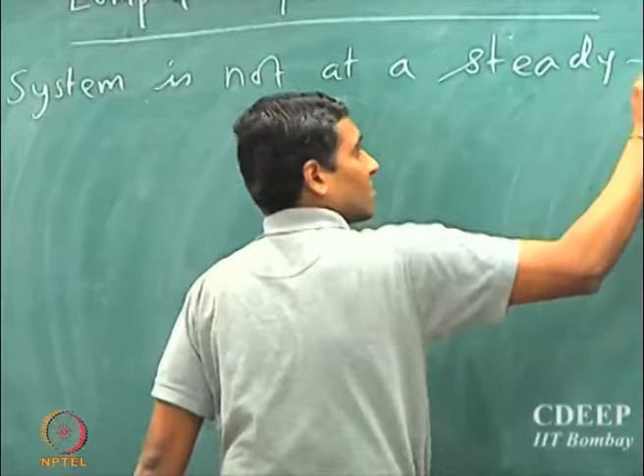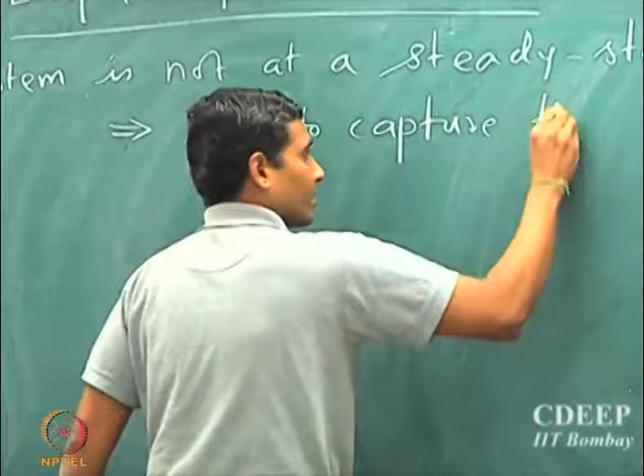So far in most of the cases in conduction, we assume that the system is maintained at a steady state. Okay, so what happens if the system is not at its steady state? It's possible it's not maintained.

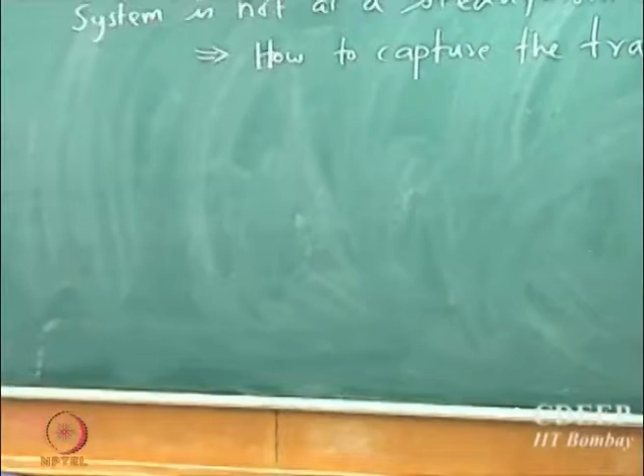A very easy example is you take a cup of coffee, tea, or milk, whatever, and just leave it on the table. So there's really no steady state till the system reaches the same temperature as that of the surroundings. So really the steady state of a cup of coffee or chai kept on the table is the state at which every location or every particle in that cup actually reaches the temperature of the surroundings.

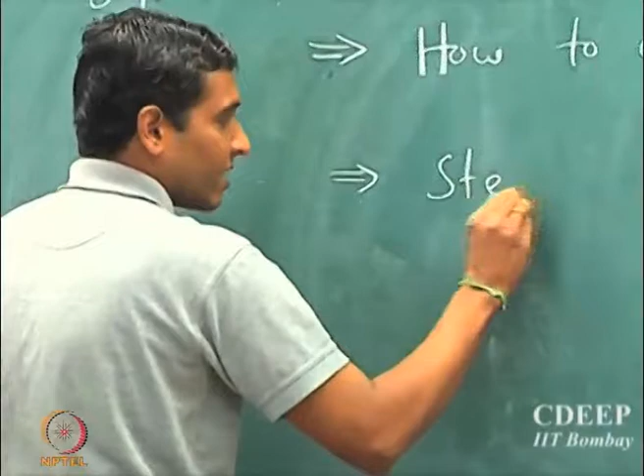Or the steady state really here means steady state is equilibrium with the surroundings.

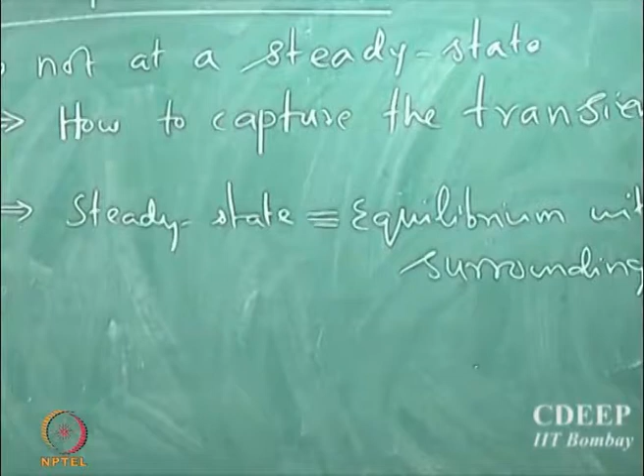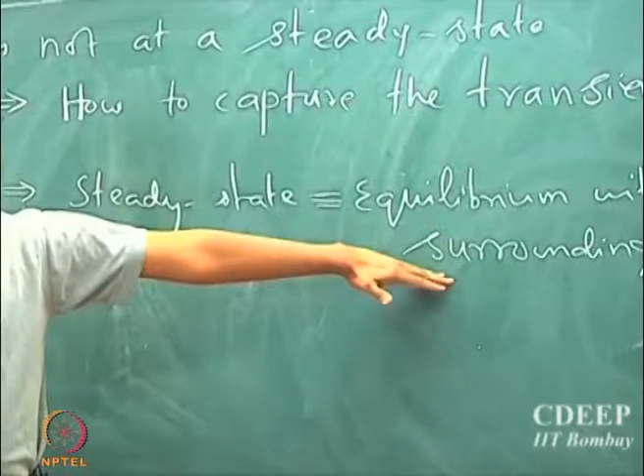So all the cases we have seen, all the models we have written so far, except for the general model that we wrote, are all for systems where it has already reached an equilibrium with the surroundings. So the question is, that's not always true. There are systems where they may not be under equilibrium. So how do we characterize them? How do we quantify them? And what kind of analysis and understanding can we get?

So that's what we are going to see in most of today's lecture. Okay.

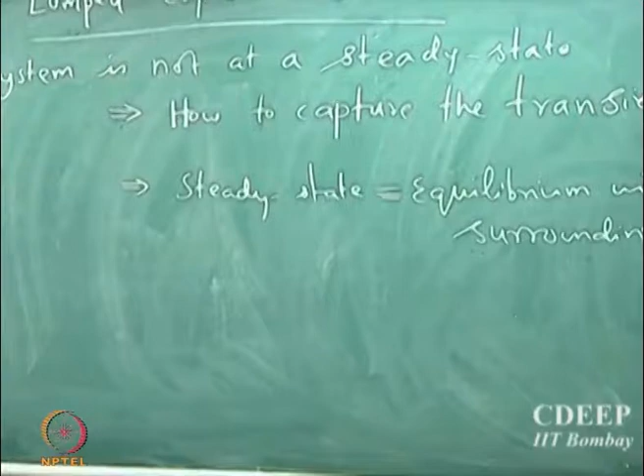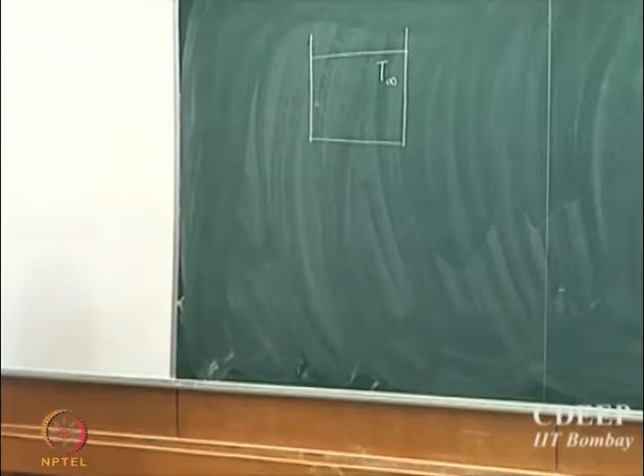So supposing we take a container, okay, which is filled with a certain fluid, and let's say that the temperature of the fluid is T infinity. And let's say there is some solid material whose temperature is Ti. And if I assume that T equal to 0, that is time equal to 0, is essentially when this body is actually outside the fluid, and at T equal to 0 I drop it inside.

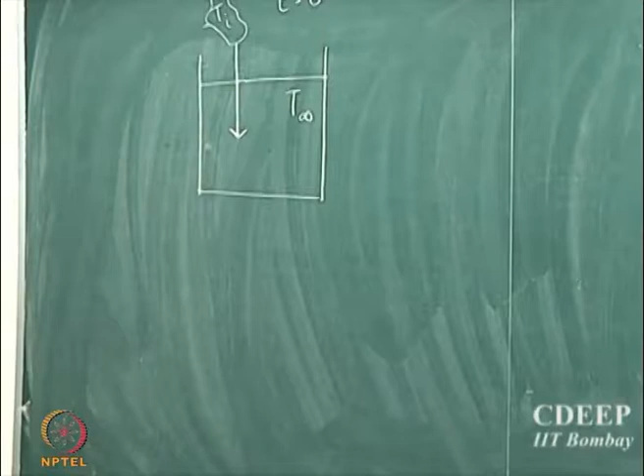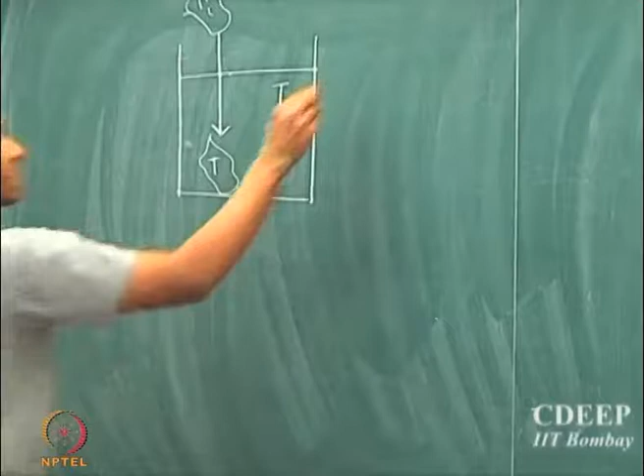So I drop the solid body into the liquid. So supposing if Ti is greater than T infinity, as soon as you drop it, there is going to be exchange of heat. So the solid, because it is at a higher energy state, at a higher temperature, it will lose heat to the surrounding fluid, and then it will attempt to equilibrate itself with the surroundings. So that's the normal process.

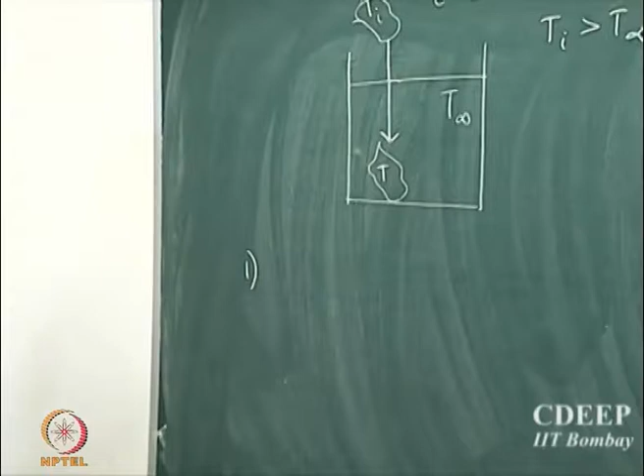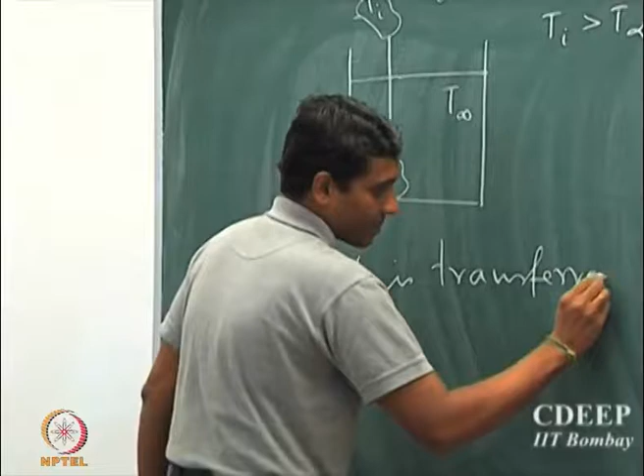So the first observation is that heat is transferred from solid to liquid.

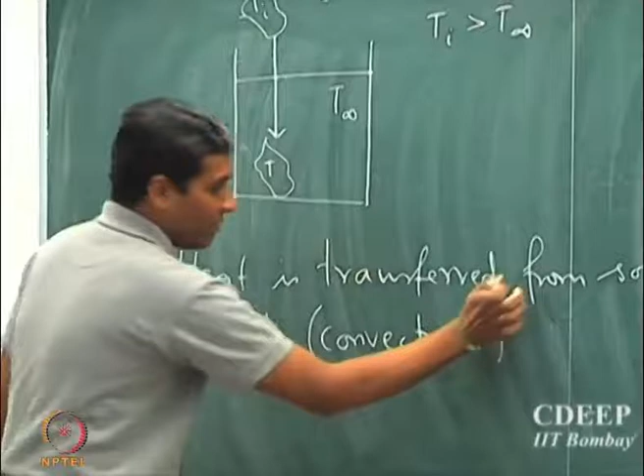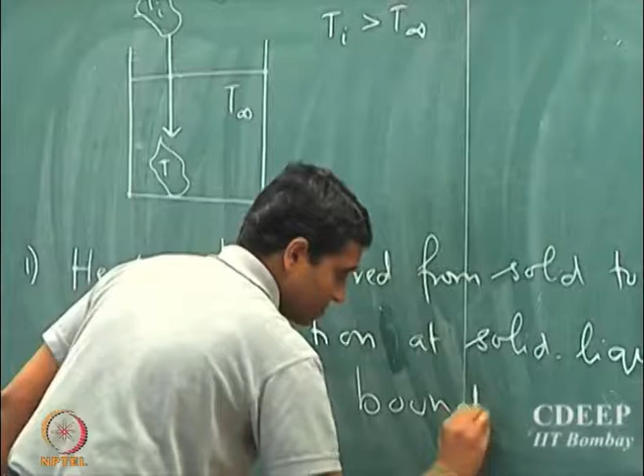What's the mode of heat transfer? Convective, right. So what really occurs is convection at the solid-liquid boundary.

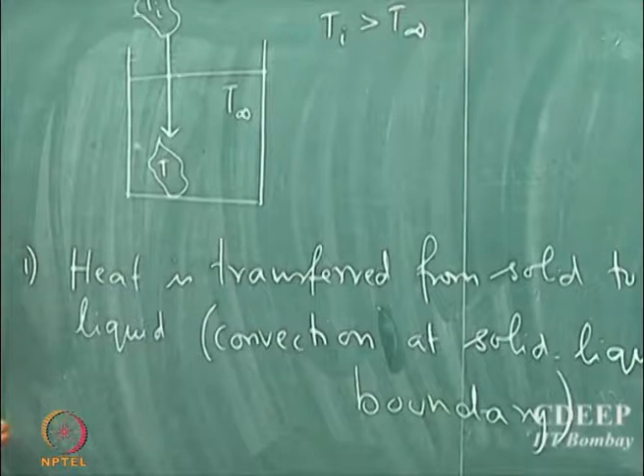What happens inside the solid? So there is conduction, okay.

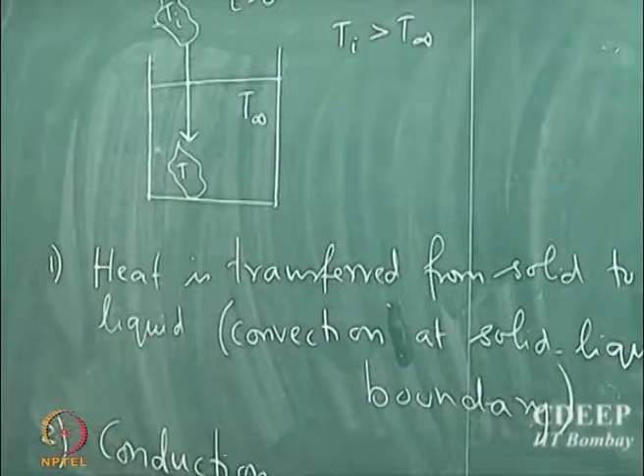So there are two ways to go about it. Supposing we say that conduction is important inside, then we know how to write the model. We've done that. We said accumulation equal to input minus output plus generation, etc. So if I assume that generation q dot is 0, we know how to write it.

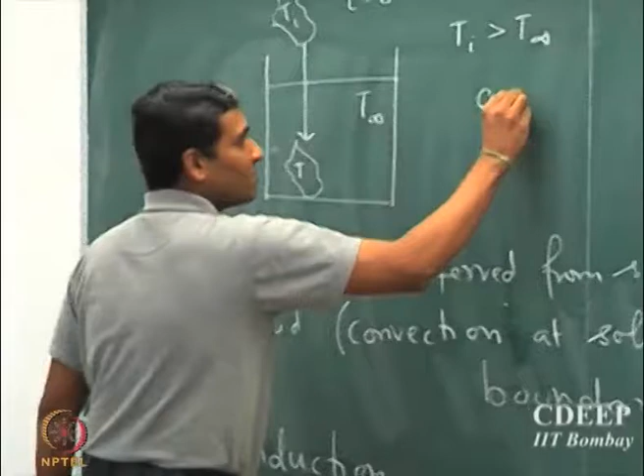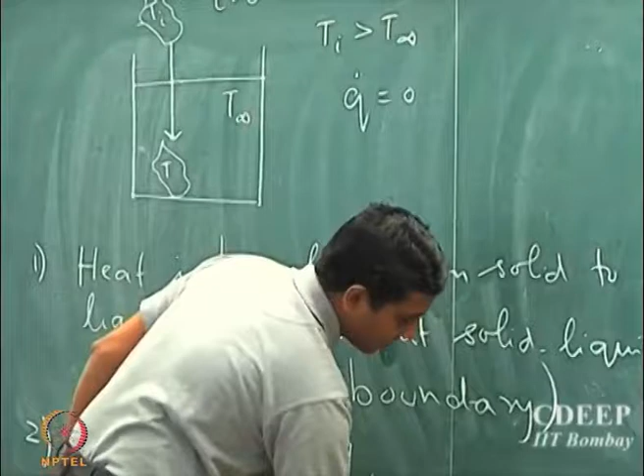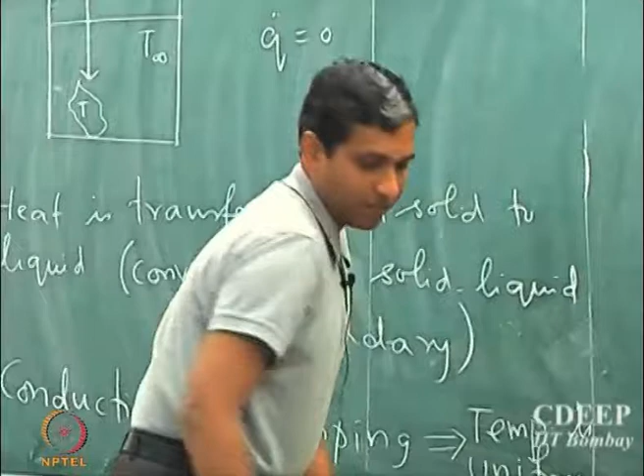Now, supposing if the dimensions of the object are very small in all three dimensions, then one can do what is called the lumping approximation. What it really means is, as we have seen before, we assume that the temperature is uniform in the solid. So that's what we mean by lumping here.

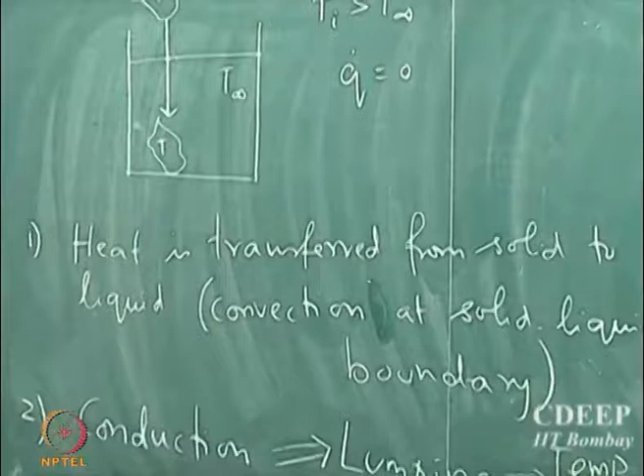Now, how do we model this? You want to try? How should we approach it? The objective is we need to quantify this process. Where do we start? So whatever heat is lost, if you assume the temperature is uniform, whatever internal energy is lost to the fluid is equal to the rate at which the temperature is changing somehow, right? So there will be some proportionality constant, etc. That has to be related to the rate at which the temperature is changing inside the solid.

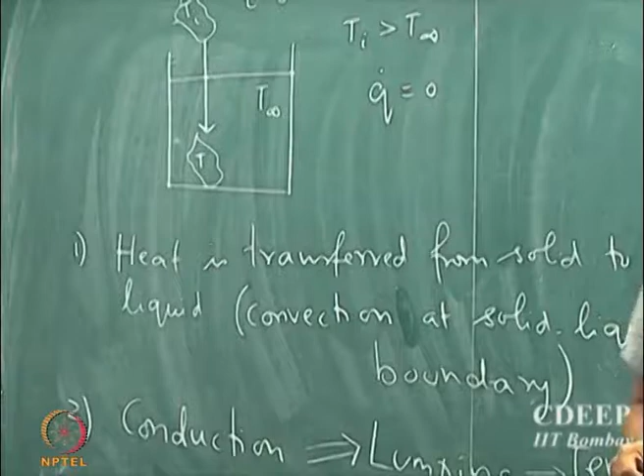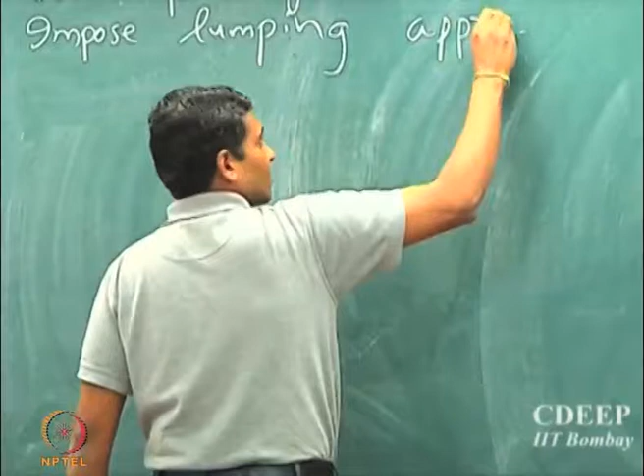So there are two ways to write the model. One, certainly you could start from the general model and then impose the lumping approximation. It's not very difficult to do, in fact it's very easy. All you have to do is integrate and substitute the corresponding boundary conditions.

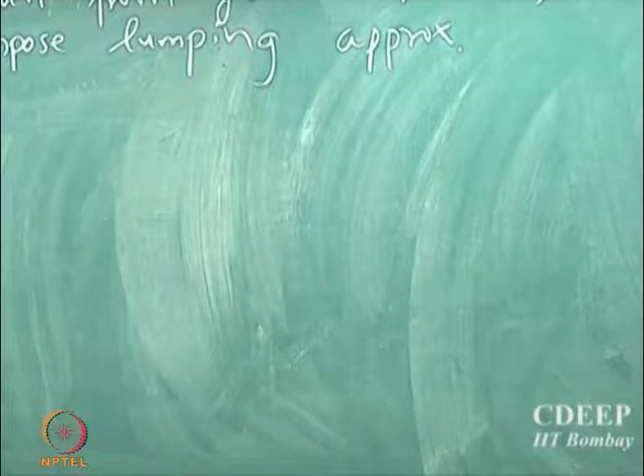Now, a simpler way to do this, that involves some math of course. A simpler way is one can write the model from first principles.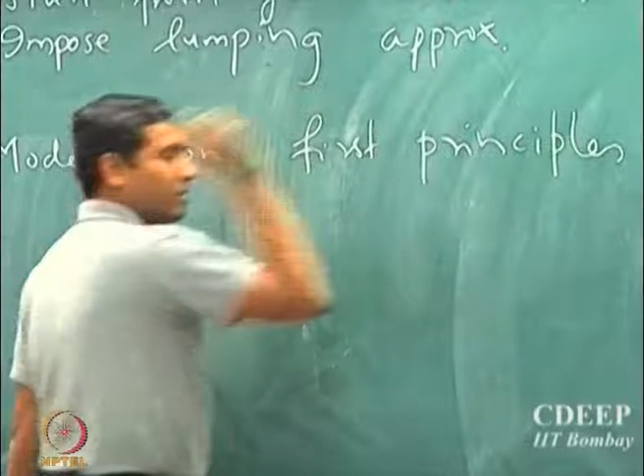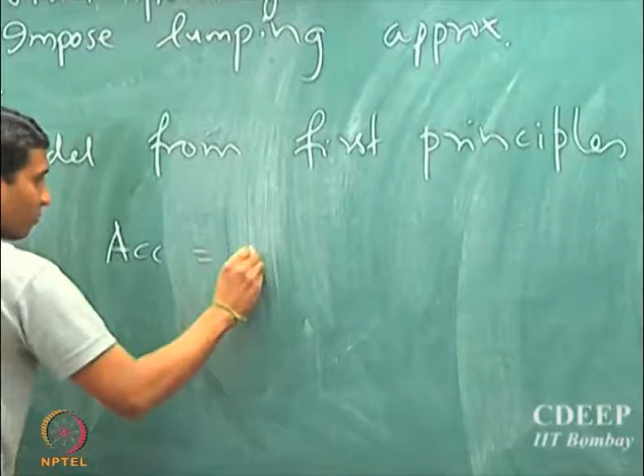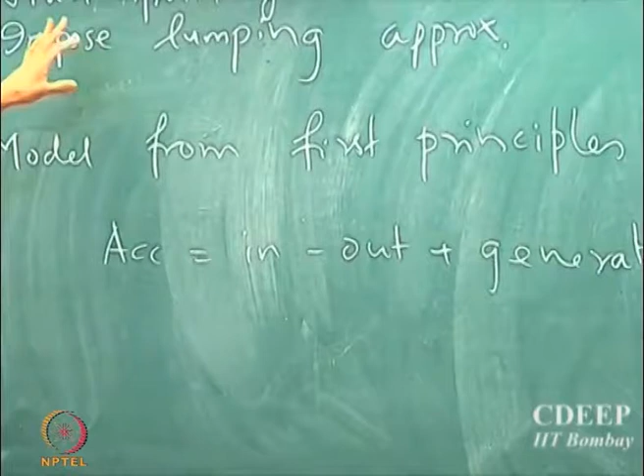A simpler way is to write the model from first principles. We know the common mantra for all of these: accumulation equals what comes in minus what goes out, plus what is generated. The original general model was also derived using this mantra, but if you use this route, whatever lumping approximation you would do by integrating is already taken into account by writing the model from first principles. You could do either way, it doesn't matter. You should get exactly the same model.

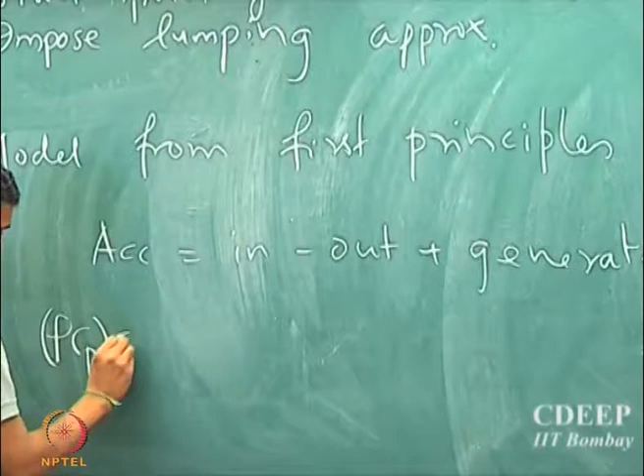So it's very easy to write this: rho Cp into dT by dt. That's the accumulation term.

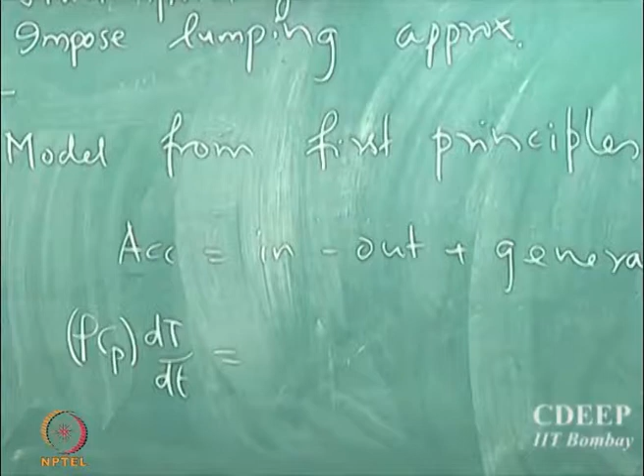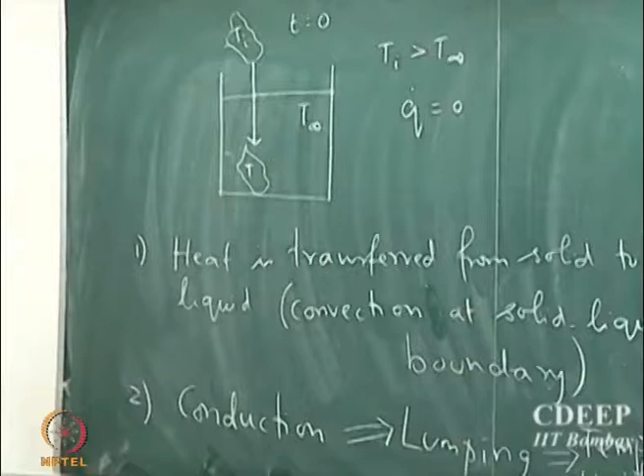What's the input? So the first thing I want you all to realize is that when we wrote this first principle route to find a general model, we wrote a differential balance. Now when we introduce the lumping approximation, there is no differential element here. So what do we do?

We need to multiply this by area.

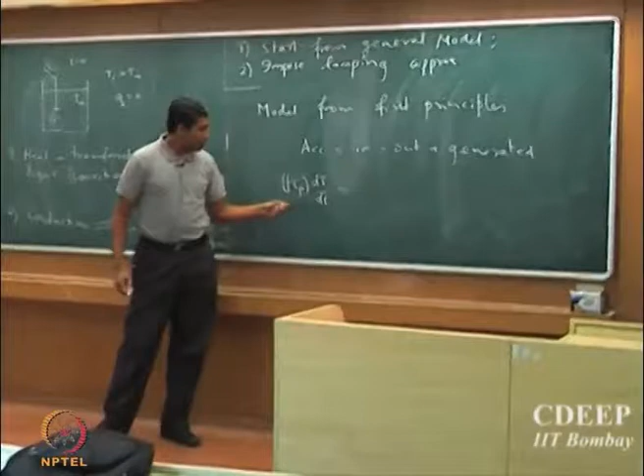That's not right. The first term here corresponds to accumulation. You should remember that rho Cp reflects or quantifies the amount of heat that is stored inside the system, inside the solid. So that's a volumetric process. The capacity of the system or solid to store heat is actually a volumetric process, not a surface area process. So you have to multiply this by the volume of the system you are looking at.

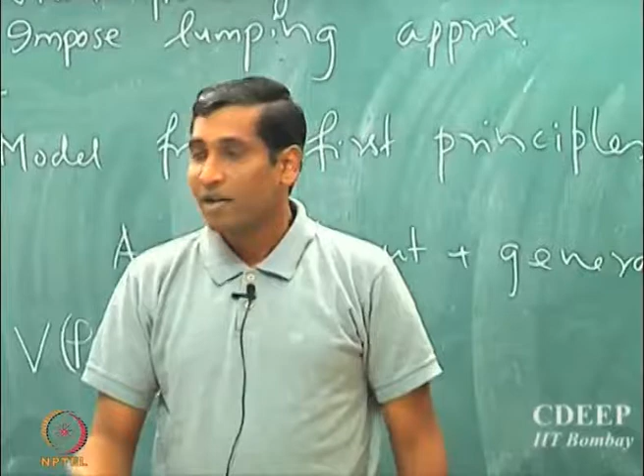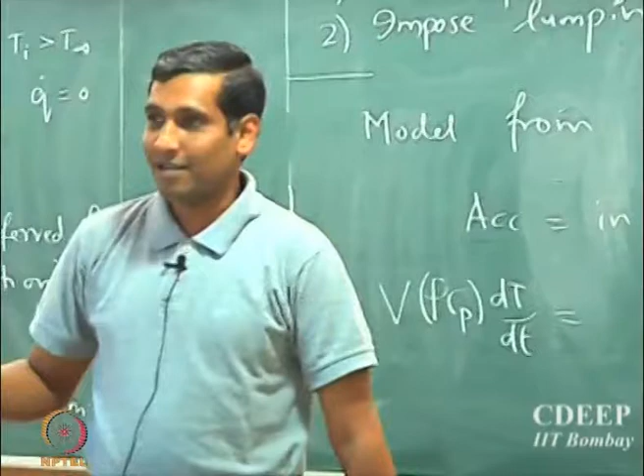If you do it from the first principle, from the generalized equation, and integrate, the volume scaling will actually come from the integration. It's a good exercise to try this: start from the generalized model, introduce the lumping by integrating over the whole volume, and you will see that the volume term will come as a scaling factor in the accumulation term.

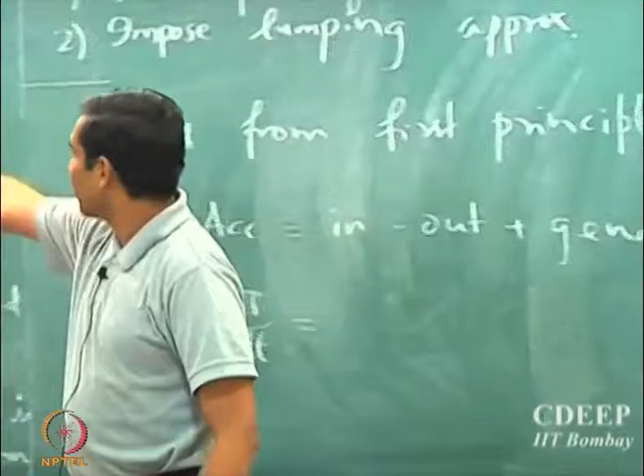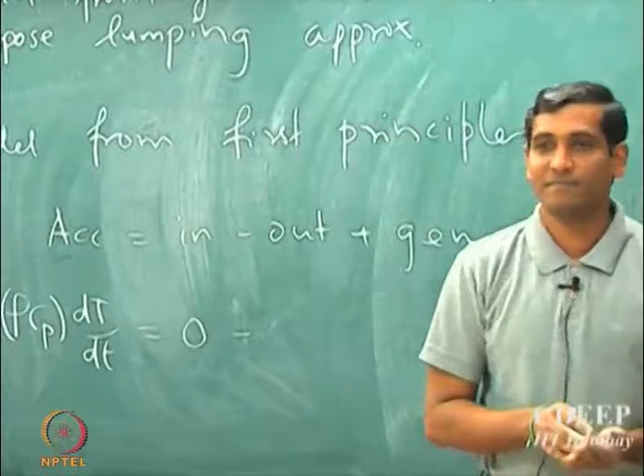So what comes into the solid? Nothing, because it's heated and suddenly dropped inside, so there is no heat coming into the solid, input is 0. What is going out? H into, that's the convective mode of heat transport, which is a surface area process, so it's H into the total area available for heat transfer, multiplied by the temperature difference. That's the amount of heat going out, plus generation is 0.

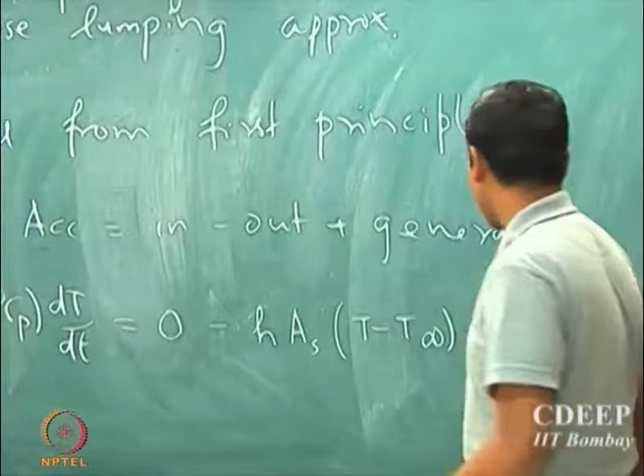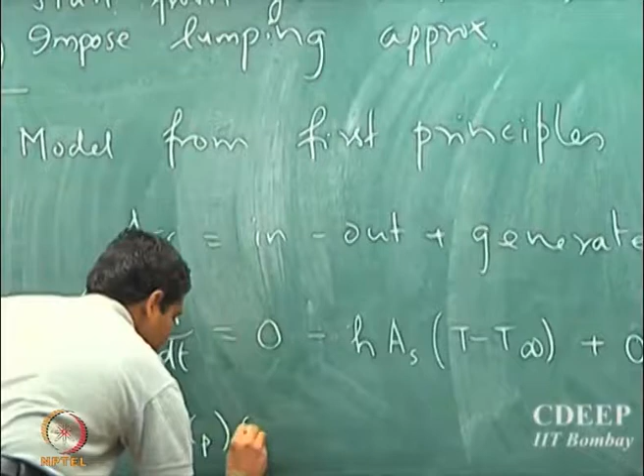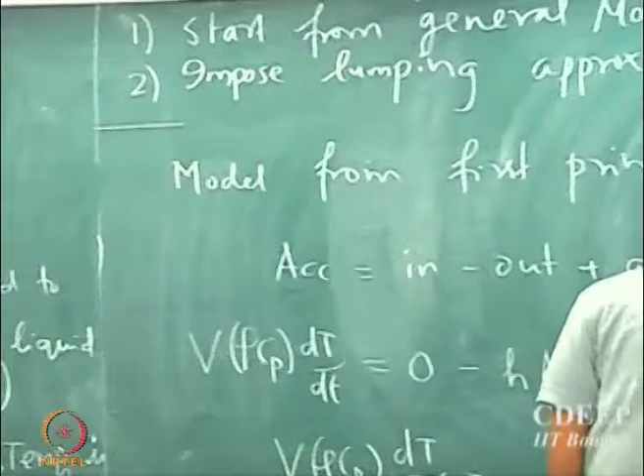So the model is very simple: V times rho Cp dT/dt equals minus H As times T minus T infinity. That's the model. What's the initial condition? T is Ti, that's it. So the initial condition is T at t equal to 0 equal to Ti. Is that clear to everyone?

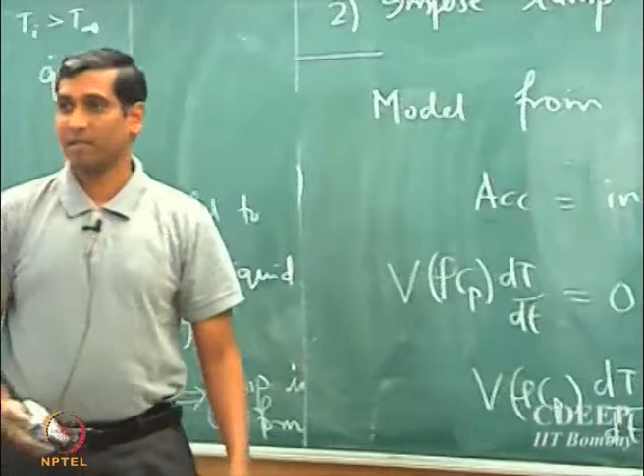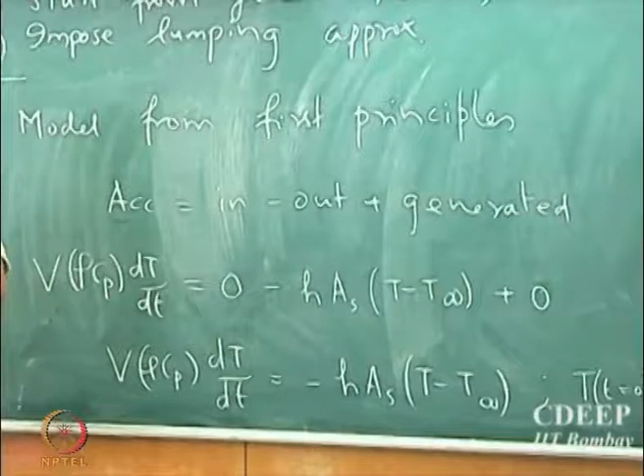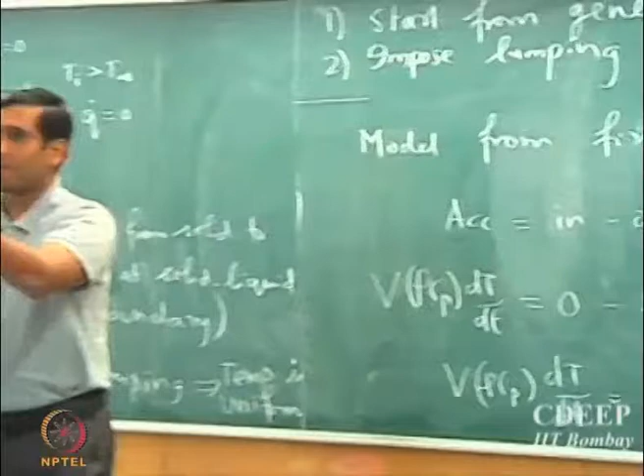So far we didn't get into this because it wasn't required when looking at differential balances. You must understand that the capability of a system to store heat is a volumetric process, while its capability to transport heat is a surface area or cross sectional area process. Whenever there is conduction, it's heat flowing across a cross section, and whenever there is convection from the solid to the fluid around, it's the surface area that matters. So you must understand the correct set of dimensions associated with each of these terms in the model.

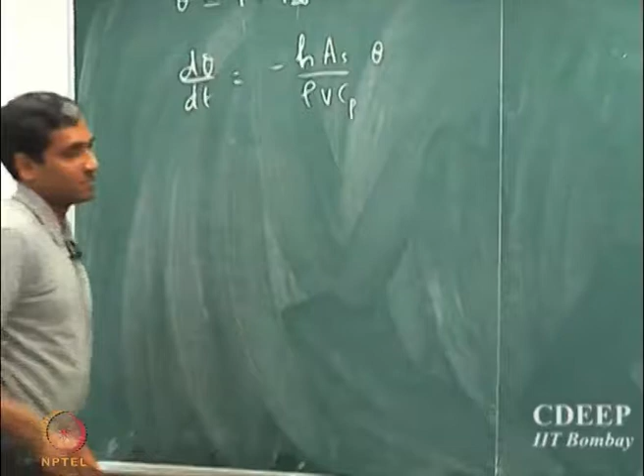So the solution is very trivial. If I assume theta is T minus T infinity, I can rewrite the model as d theta by dt equal to minus h As by rho V Cp into theta. And so the solution is theta by theta i equal to exponential minus that term times t. That's the solution.

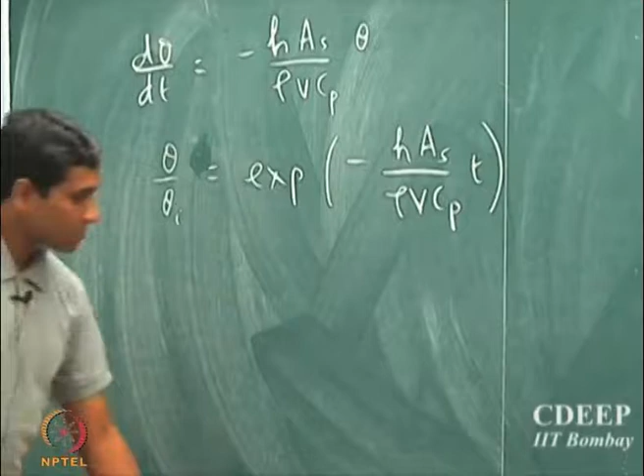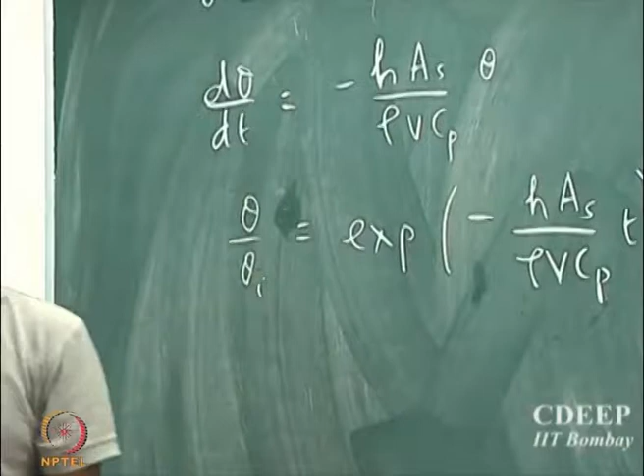What can we say about the coefficient in front of time? What should be the units of this coefficient? It should be 1 by second, right? Because the quantity inside the exponential should be dimensionless. So if time is in seconds, the units of the coefficient should be 1 by second. So it really signifies a time constant.

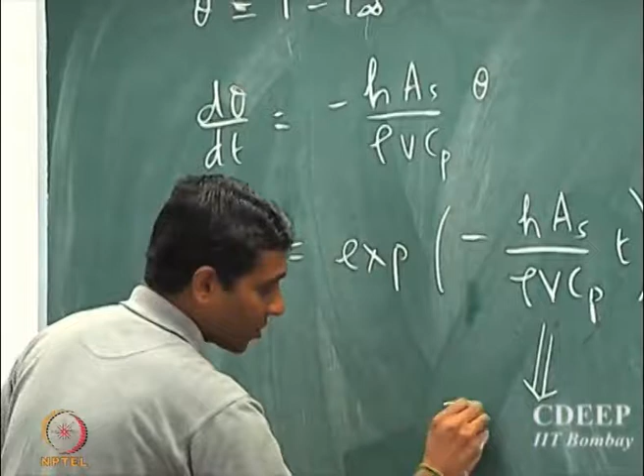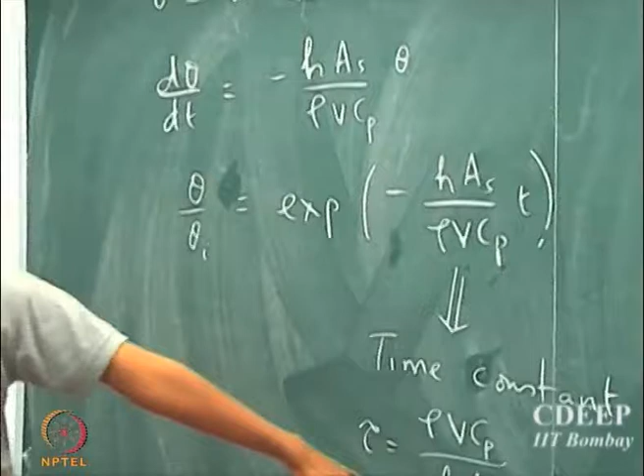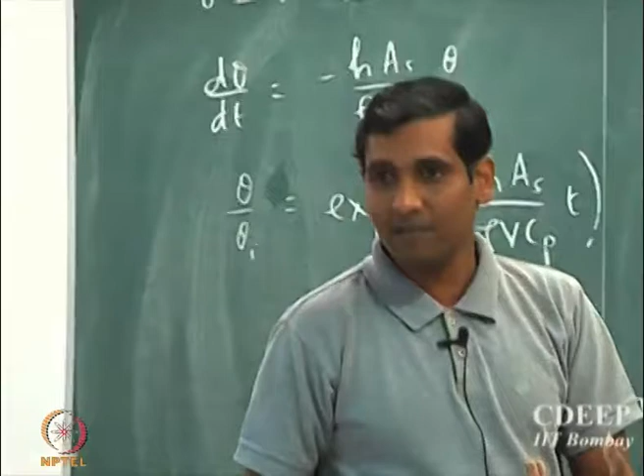Based on the coefficient, one could define a time constant for this process as tau equal to rho V Cp by H into As. If you plug in the units, you will see this exactly has the units of seconds, dimensions of time. So one can define a time constant for the process, which signifies the time taken for the heat to be lost from the solid to the fluid.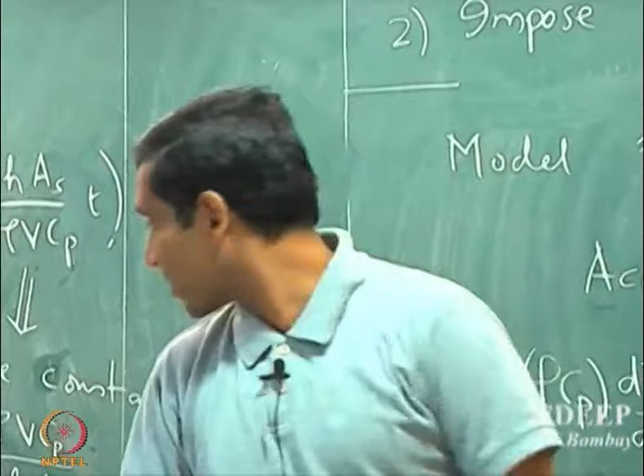Note that you can see two terms here, so there is once again a competing process. One is the ability of the solid to store heat, the other is the ability of the system to lose heat to its surroundings. So one could rewrite the time constant as something like this.

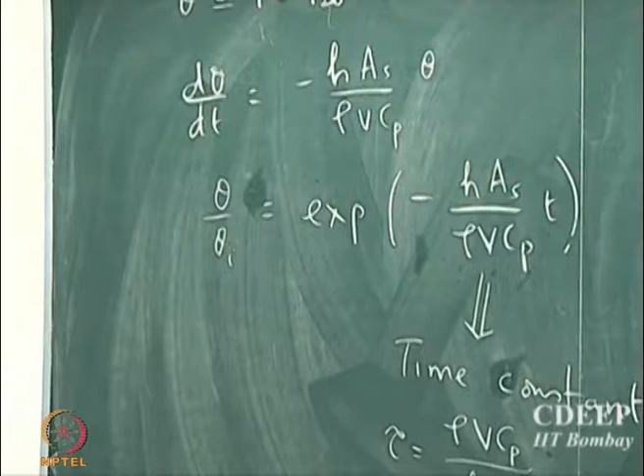So you can write tau as 1 by h into As into rho v into Cp. What is 1 by h into As? It's the resistance for convective mode of heat transport. So you can define this as resistance for convection.

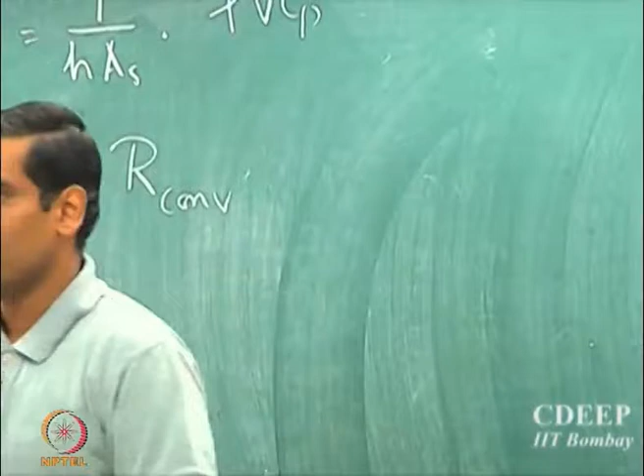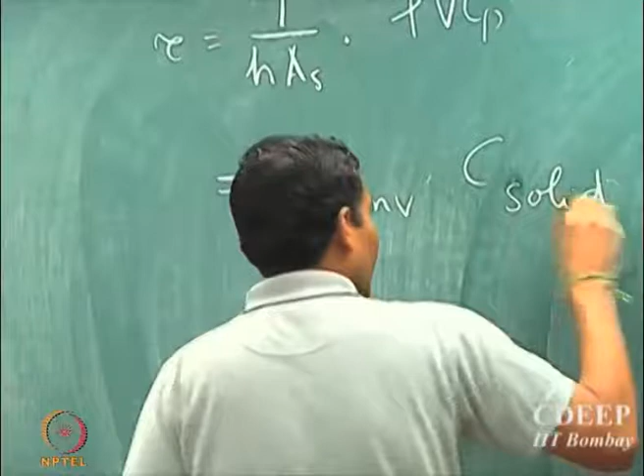What is rho v Cp in terms of electrical engineering terms? Resistors and capacitors. So it's the C of the solid, the capacitance or capacity of the solid to store heat. So the time constant is simply the convective resistance offered by the system for convection of heat from the solid to the fluid, multiplied by the capacitance, that is the ability of the solid to store heat in its volume. Is that clear?

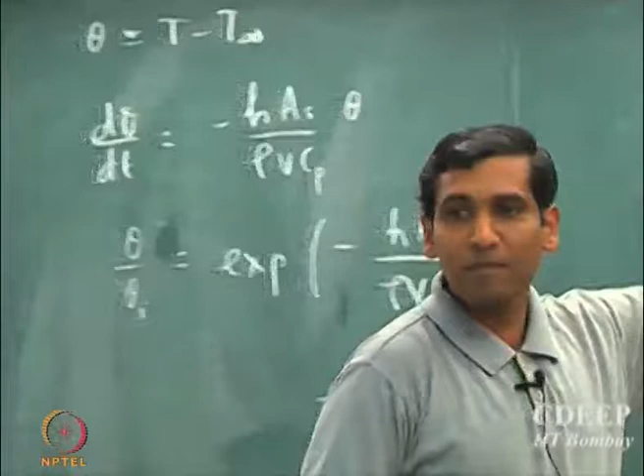So it's very important to understand time constants. In fact, this is probably the first time you are seeing in this course a definition of time constant, and you will see a lot more very soon. Mostly you will see one more in today's lecture, and many more in future lectures. Why are time constants important?

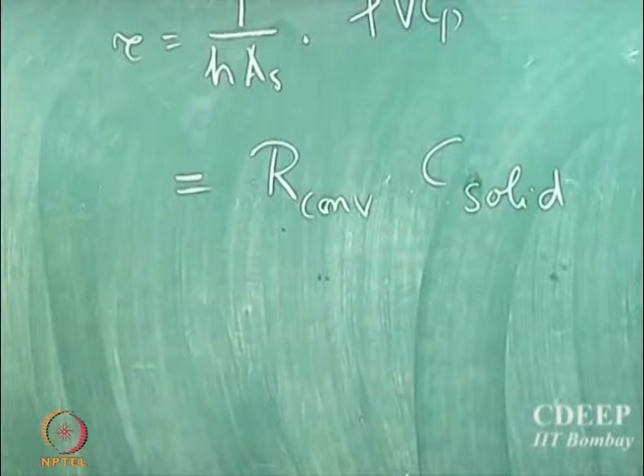Time constants capture what is the time taken for a certain process to occur based on the properties of the system. Note that these are all properties of the system you are considering. So if you know what the properties are, I don't need to know whether density is increasing or decreasing independent of the others. As long as I know the time constant, as long as I am able to relate the temperature change with respect to time constant, I am done. I can play with many different parameters to achieve the same feature I want.

For example, I could increase the capacity of the solid by choosing a different material, and if I know how to change the heat transfer coefficient, which you will see when we discuss convection, then I could make sure these two are simultaneously changed so that the time constant doesn't change. So this provides an elegant method to compare heat transport processes across different materials.

Note that these properties are different for different materials: density, capacity, etc. They are all intrinsic properties of a solid, so they will be different for different materials. Defining such a time constant provides an elegant method to compare the rate of heat transport when you use different materials in the same system. It's very important to understand this, and you will see many more such constants and dimensionless quantities in future lectures.

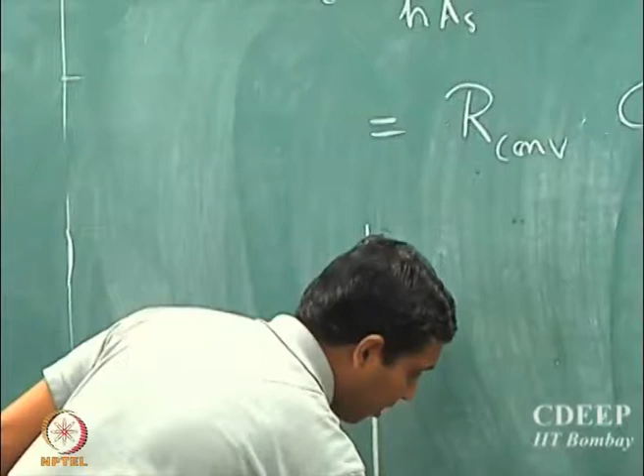So I could draw a profile. It's a simple exponential fall. This is time, and this is theta by theta I. At t equal to 0, theta is theta I, so it should start from 1.

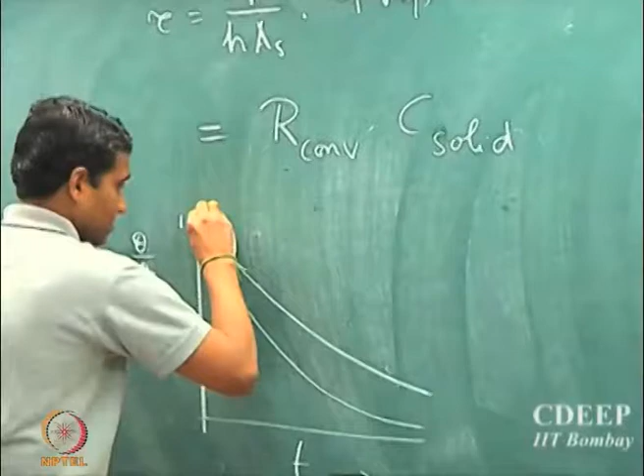As I increase the time constant, note that time constant quantifies, or gives you an idea as to the rate at which heat is going to be transferred. So as you increase the time constant, the slower the heat transport will be. It will take a much longer time to reach equilibrium. What is the equilibrium?

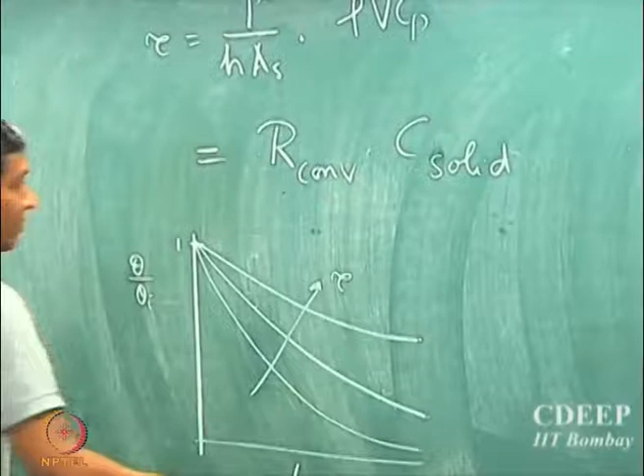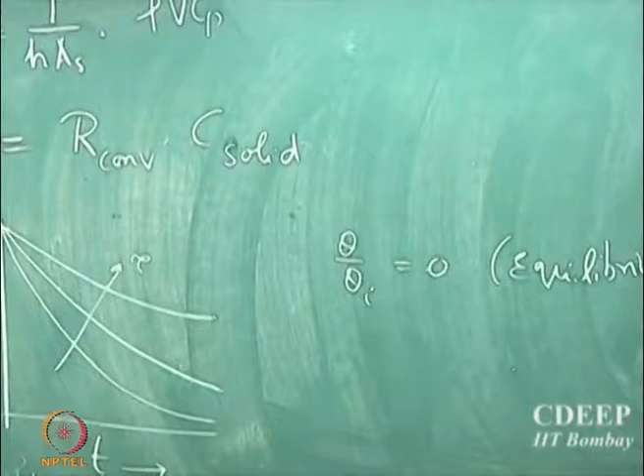T equal to T infinity, so equilibrium is theta by theta I equal to 0, that's the equilibrium. So when the time constant is large for a given system, it takes much longer for it to equilibrate. Depending upon the system, what kind of properties you want for a given system, it has to be designed so that you get the correct time constant, so you should be able to predict when the system is going to reach an equilibrium.

So this is a very simplistic example. Now this leads to an important question actually. We said that we made a lumping assumption, or lumped capacitance. So the important question is, when is it valid? What is its validity?

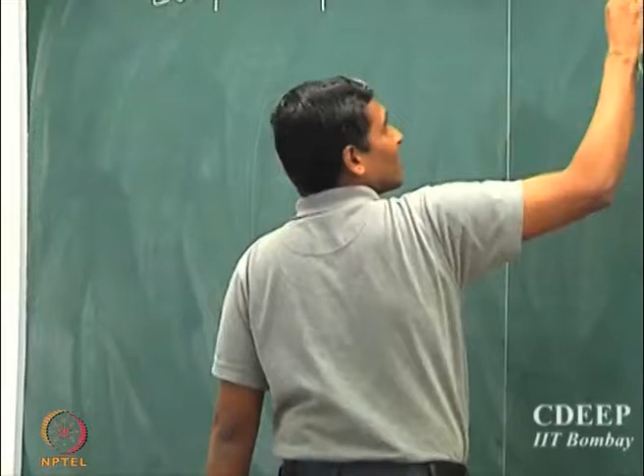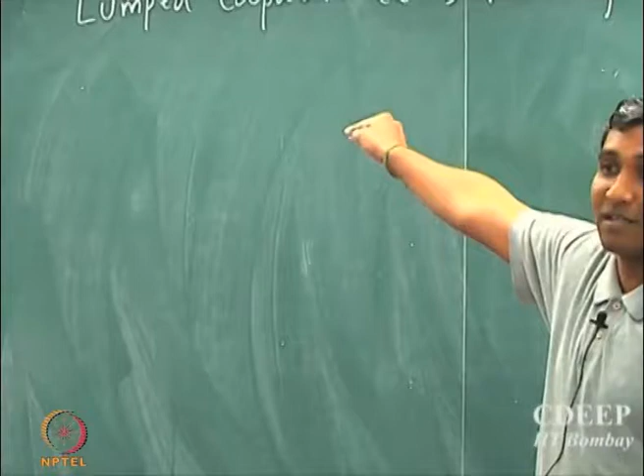When is it valid? Can we quantify the validity of this method? It's not enough to say that the dimensions are small and therefore I can approximate it to be uniform temperature. If the conductivity of the solid is high, not necessarily, not always valid. It's not just the conductivity, it also depends upon the dimensions, right? So it's both the property of conduction and the dimensions of the system you are looking at.

So what we are going to see now is how we can incorporate all the properties related to the conduction and convection process and come up with a quantitative quantity which can be used to justify when this method is valid.